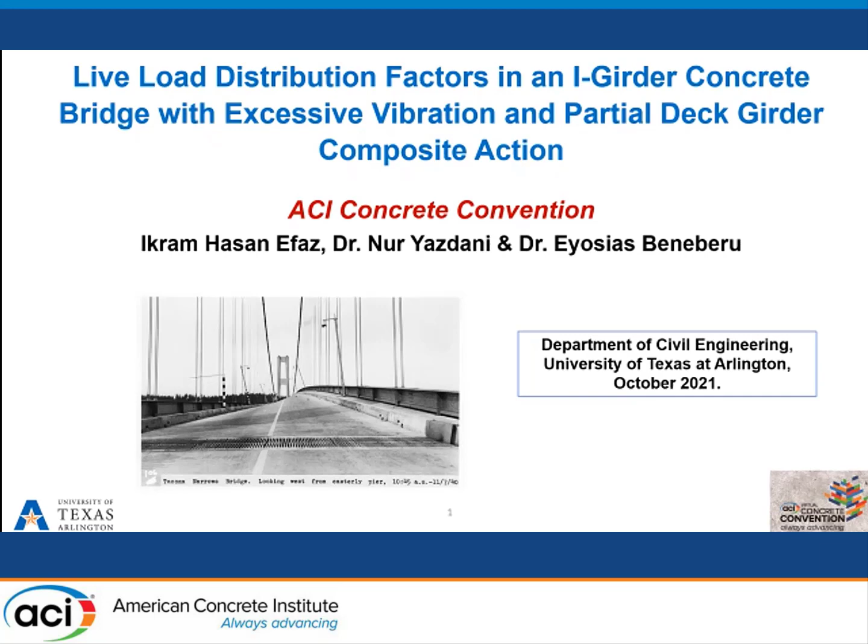My name is Ikram Hasan Efaz, and I completed my PhD from the University of Texas at Arlington this May 2021 in structures and applied mechanics, and my supervising professor was Dr. Nur Yazdani. Today, I'm going to present a portion of my research, titled Live Load Distribution Factors in an I-Girder Concrete Bridge with Excessive Vibration and Partial Deck-Girder Composite Action.

The outline of the presentation is the introduction, a description of the bridge, problem statement, diagnostic load test phase 1 and 2, then live load distribution factors, and finite element modeling.

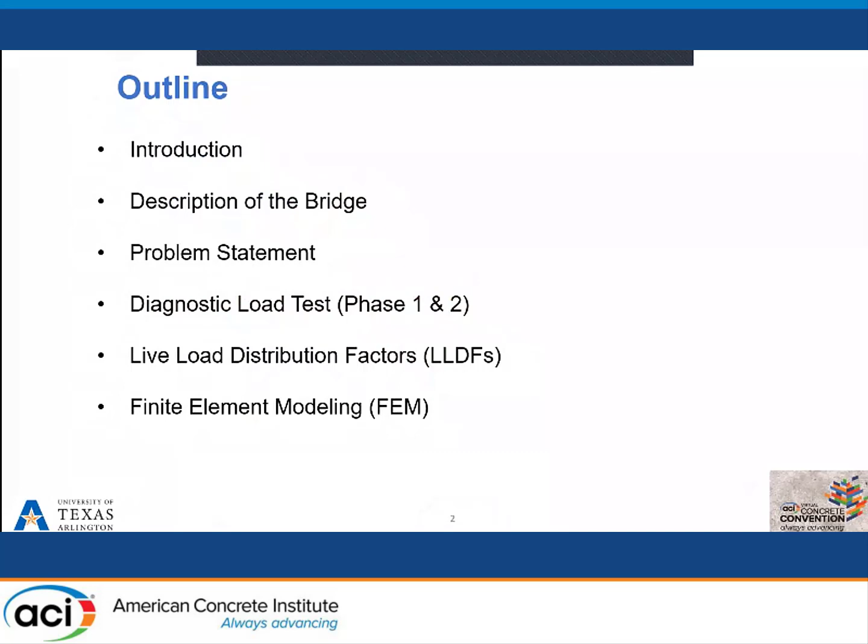The current AASHTO LRFD provision for live load distribution factor depends on various factors like span length, spacing, and stiffness of the girders. However, the AASHTO LRFD assumes 100% composite action between the superstructure elements, so it doesn't consider the effect of partially composite deck-girder interaction.

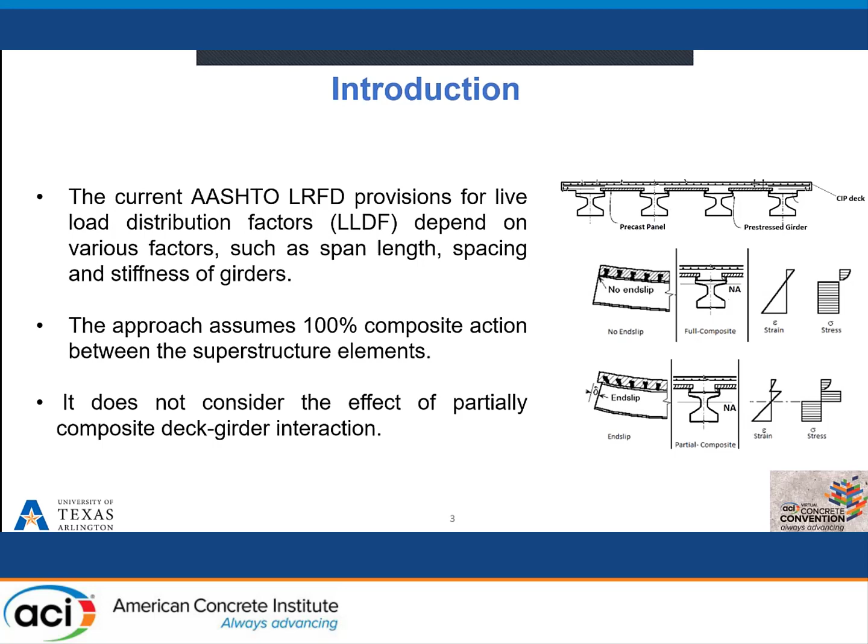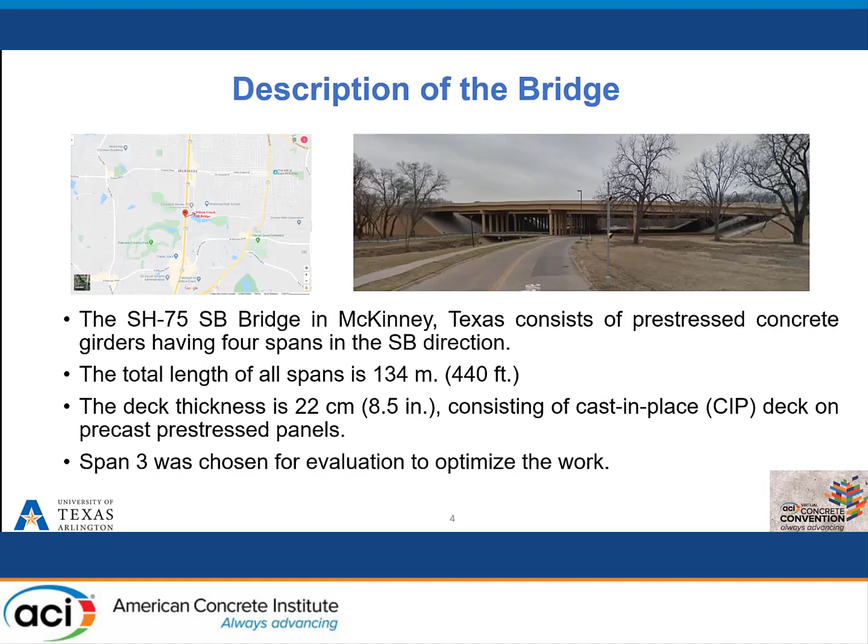The State Highway 75 southbound bridge is in McKinney, Texas. It consists of prestressed concrete girders in 4 spans, and the total length of all spans is 440 feet. The deck thickness is 8.5 inches, consisting of cast-in-place deck on precast prestressed panels. We only selected one span for evaluation to optimize the work, since that span has the maximum number of cracks and potholes. The bridge has 11 girders, consisting of TX54 girders, which is a very common scenario for bridges in Texas.

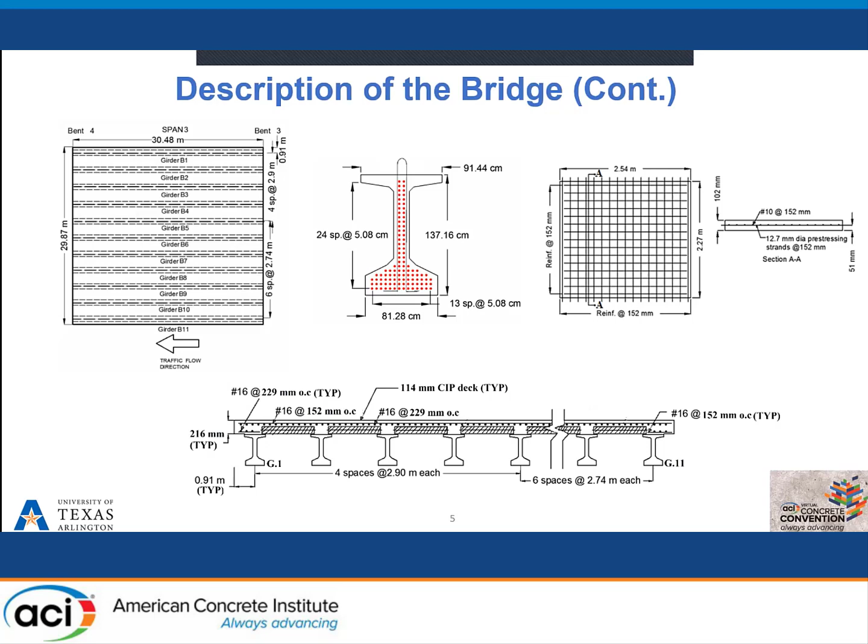For bridges in Texas, they use precast panels on top of the girders, and then there is 4 to 4.5 inches of cast-in-place concrete. All of these superstructure elements should be in full composite action according to the design.

However, the bridge was observed to have transverse and longitudinal cracking and potholes, and excessive vibration was also felt on the deck while there was traffic. The UTA team initially visited the bridge with personnel from the Texas Department of Transportation. The bridge was built in 2011, so it's very unusual for the bridge to experience such issues because it's a fairly new bridge.

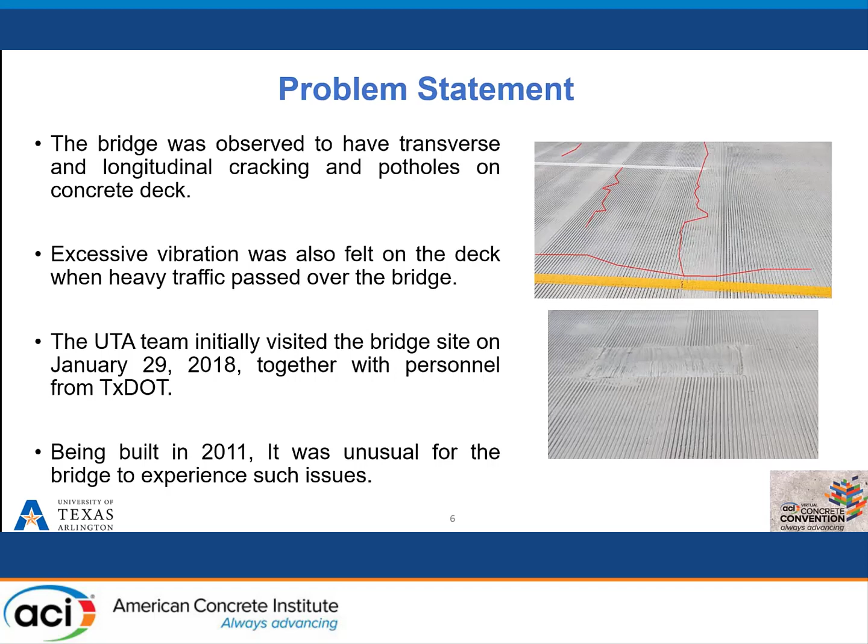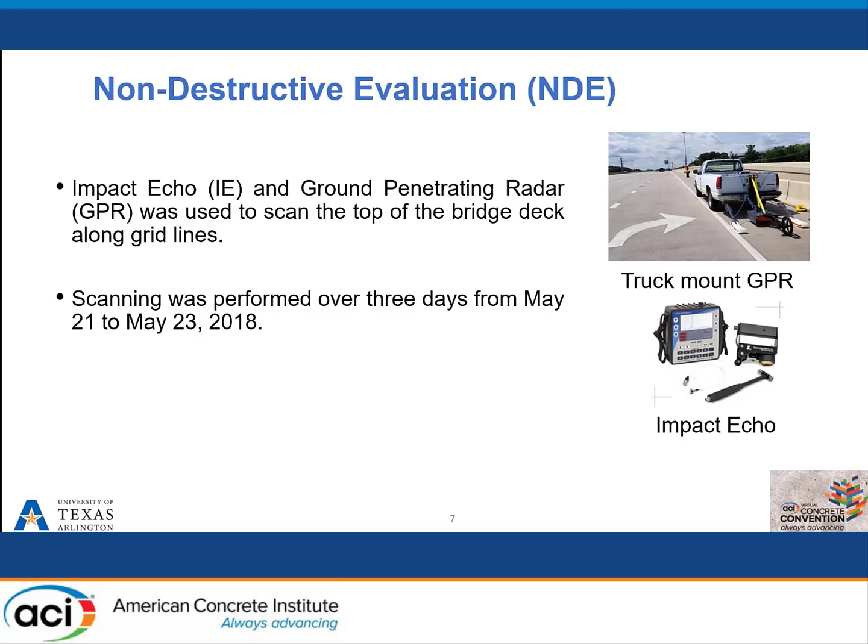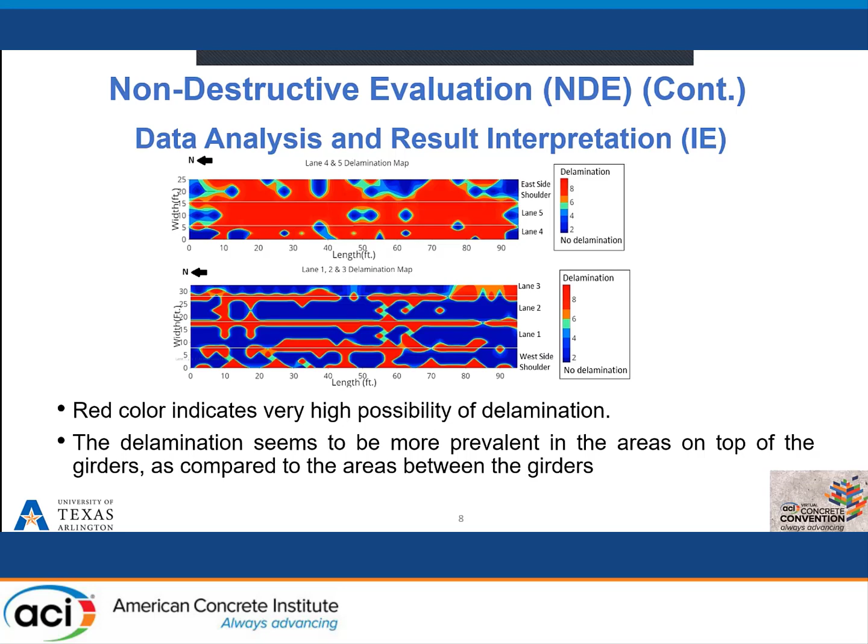So we did a diagnostic load test. The instrumentation is shown here. We used 26 strain gauges on the top and bottom of the girder, and also some strain gauges under the deck. We used a 12 rotational tiltmeter to find the end rotation of the girders, and also to find deflection.

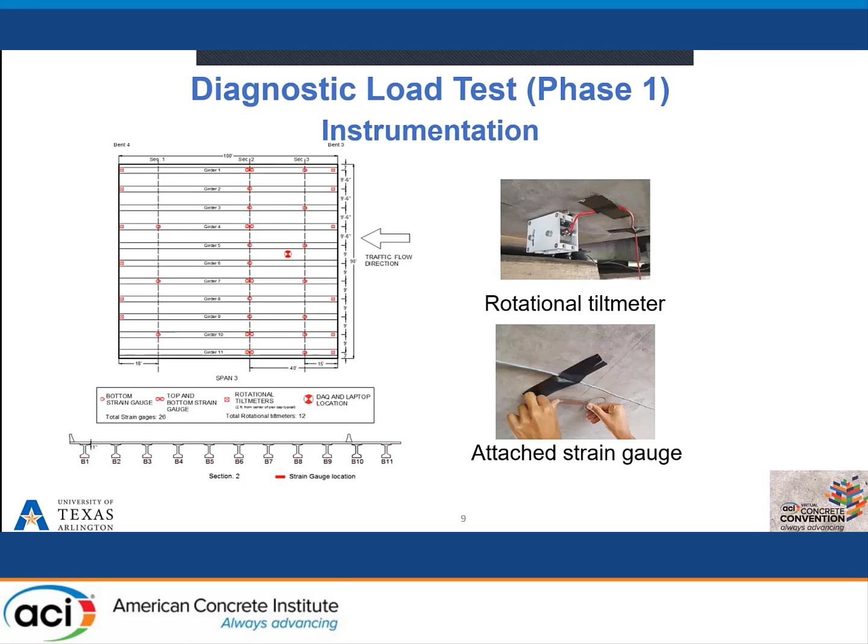Static load test was performed on span 3. Three trucks were used, and we did both a crawl speed test and a stop location test. The crawl speed test is where the truck goes on the deck, and the stop location test is when the trucks are stopped at the mid of the span for 30 seconds. We did this test according to the AASHTO manual for bridge evaluation.

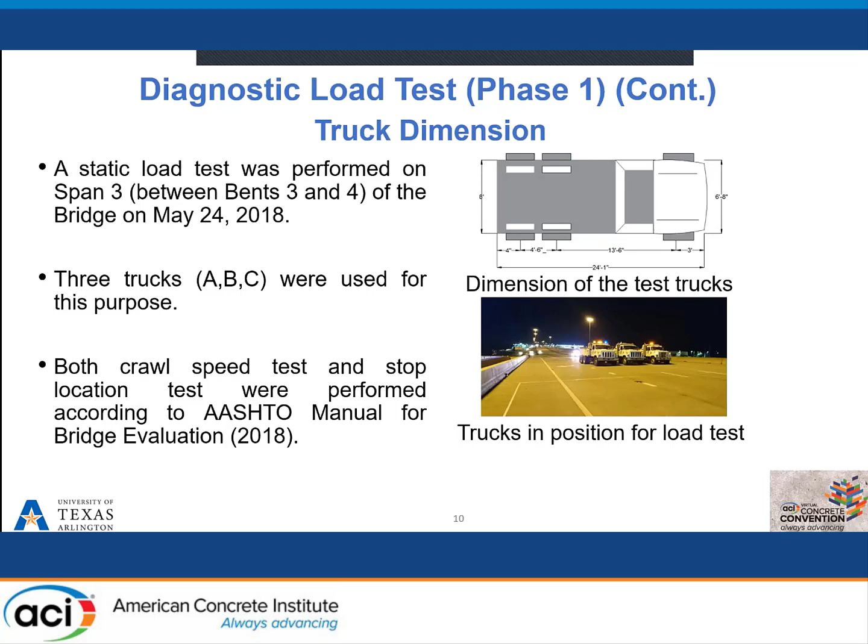These are the load test paths that we did. Every path was run twice to ensure the repeatability of the result, and we also show the weight of the axles of the trucks for the load test.

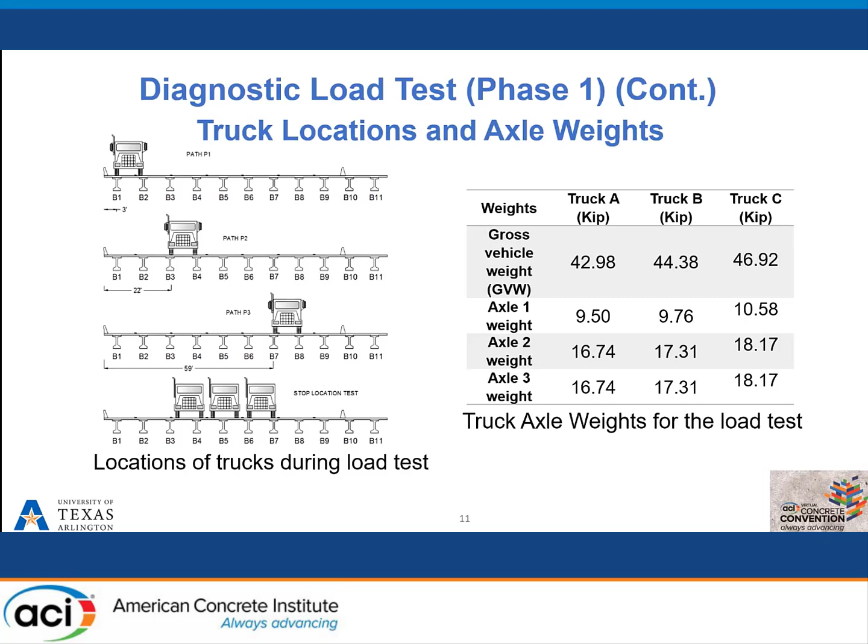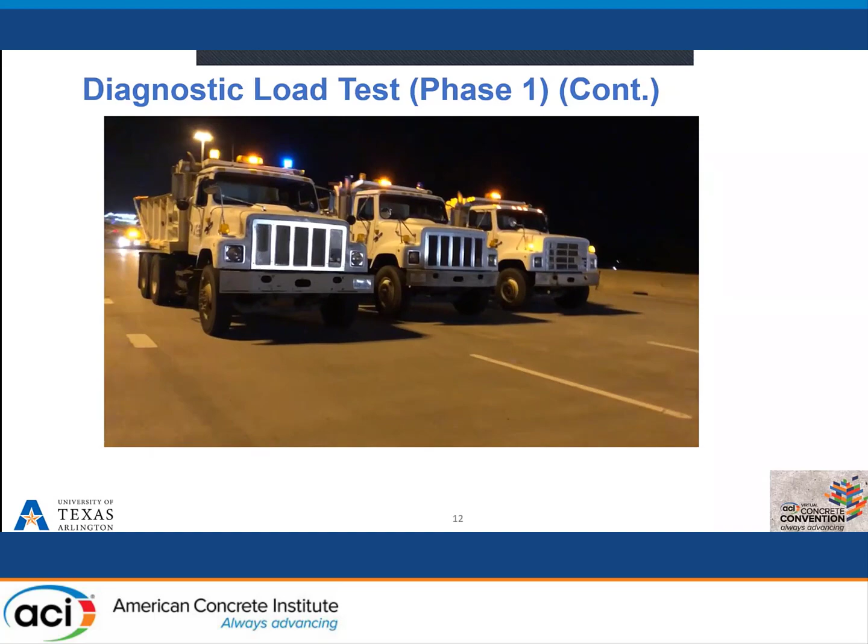So, load test phase 1: we can see the result here from the strain response for different paths. For example, for the first path P1 run 1, we can see that the truck tires are near girders B1 and B2, so B1 and B2 give us the maximum strain response, and so on.

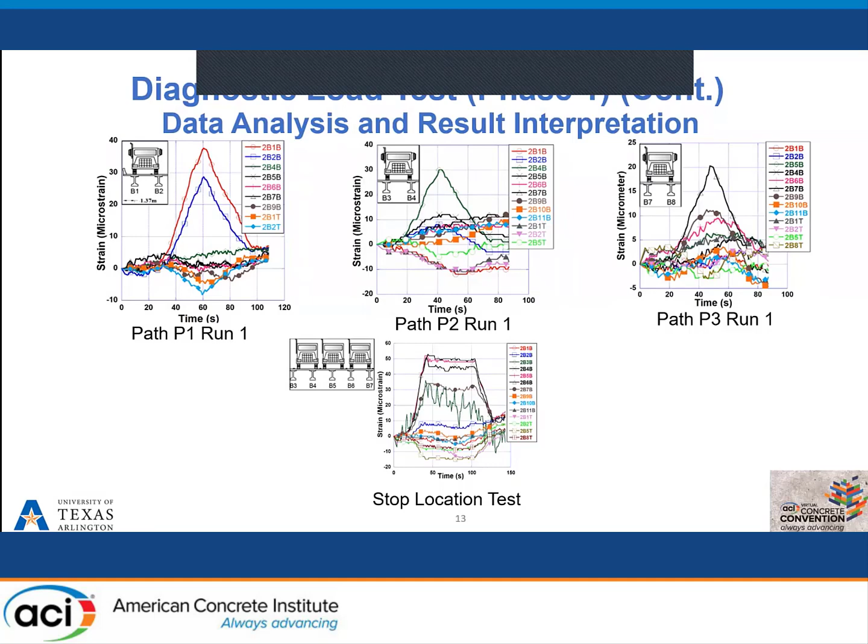We also calculated the theoretical neutral axis and the experimental neutral axis from the load test. We found that the theoretical neutral axis for full composite action was 57 inches from the bottom according to AASHTO, and the theoretical neutral axis for the non-composite girder was around 40 inches, but our experimental neutral axis was 43 inches from the bottom, which leads to the conclusion that there is a loss of composite action between the girder and the deck panel system.

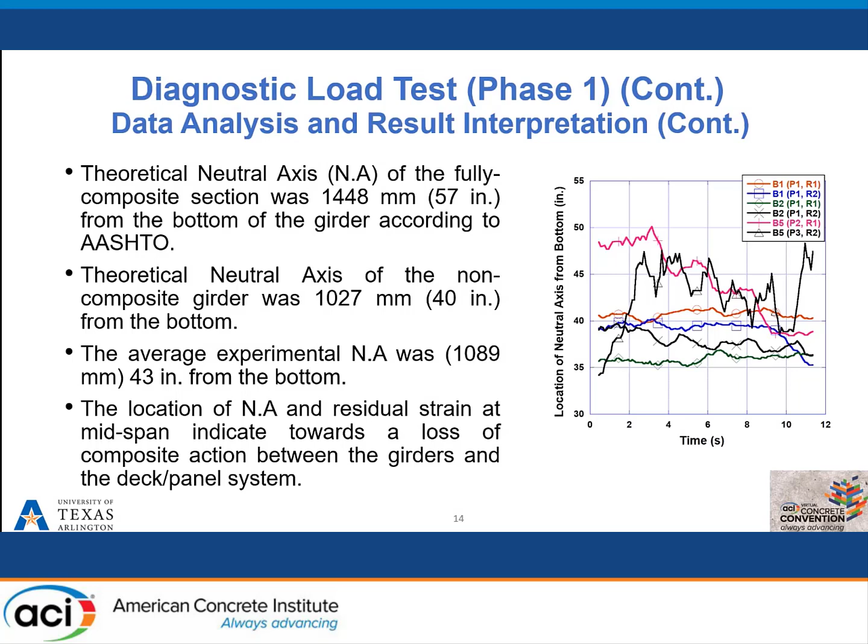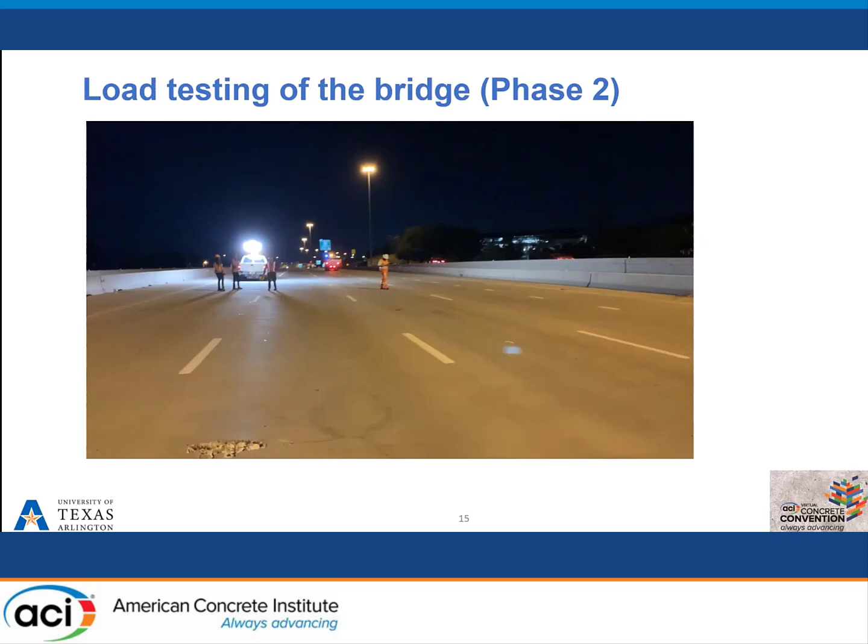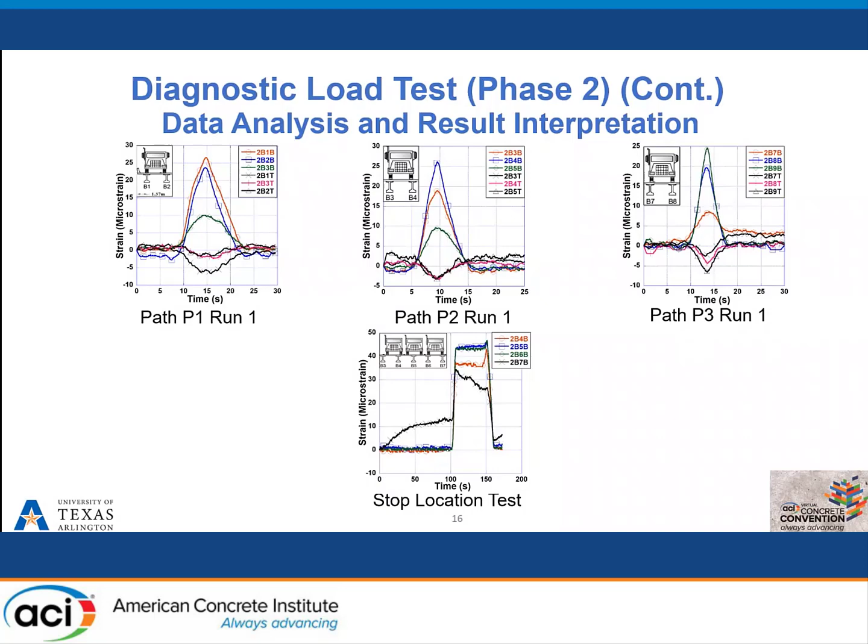After a year, we conducted another load test to see the rate of deterioration. Most of the setup was similar, so we could compare the results after one year, and we can see this is the load test result from the follow-up load test after a year. Results were pretty much identical to the initial load test.

However, there was only 15% composite action on average between the girders and the deck panel system, and due to possible concrete delamination and partial composite action, the lateral stiffness of the superstructure was reduced, and that's why there was excessive vibration due to the reduced lateral stiffness.

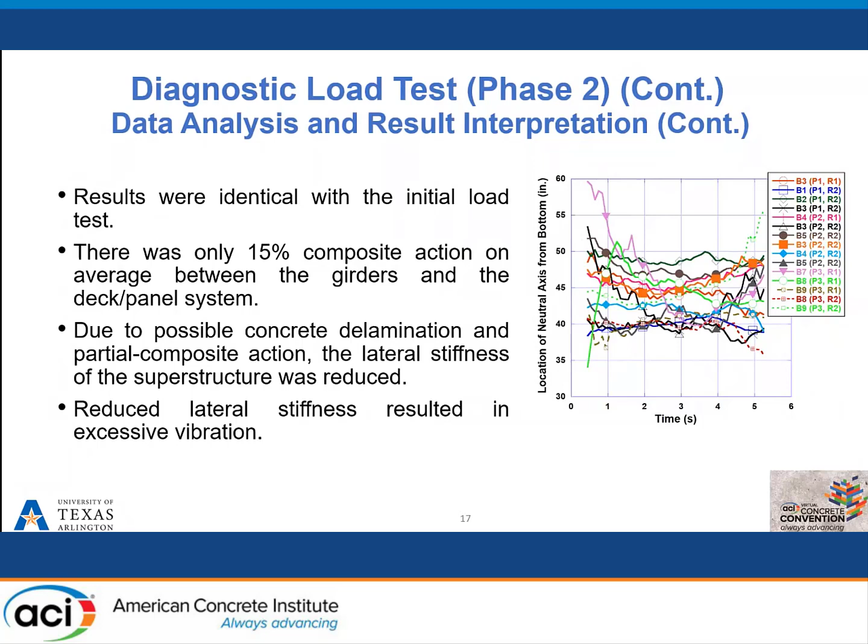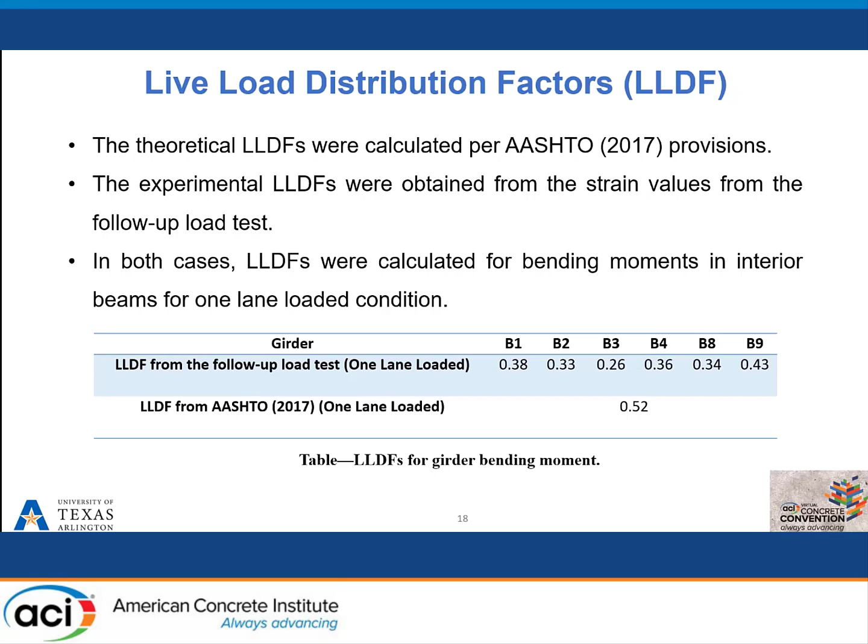So we calculated the live load distribution factor both using the AASHTO provision and also from the diagnostic load test. We calculated the LLDF for bending moment for the interior beams under one lane loaded condition, and we can see that the distribution from experiment ranges from 0.26 to 0.43, while the LLDF from AASHTO is 0.52 for one lane loaded condition. So the actual LLDF found from the load test is about 21% to 50% less than the theoretical value.

So the partial composite action in the superstructure resulted in a loss of lateral and vertical girder stiffness, which in turn compromised the girder load distribution characteristics. That's why extensive lateral and longitudinal cracks were also found on top of the deck, which supports our conclusion, and also the impact echo data showing a lot of delamination on top of the girder lines also support our statement that there is a loss of composite action between the girder and the deck panel system.

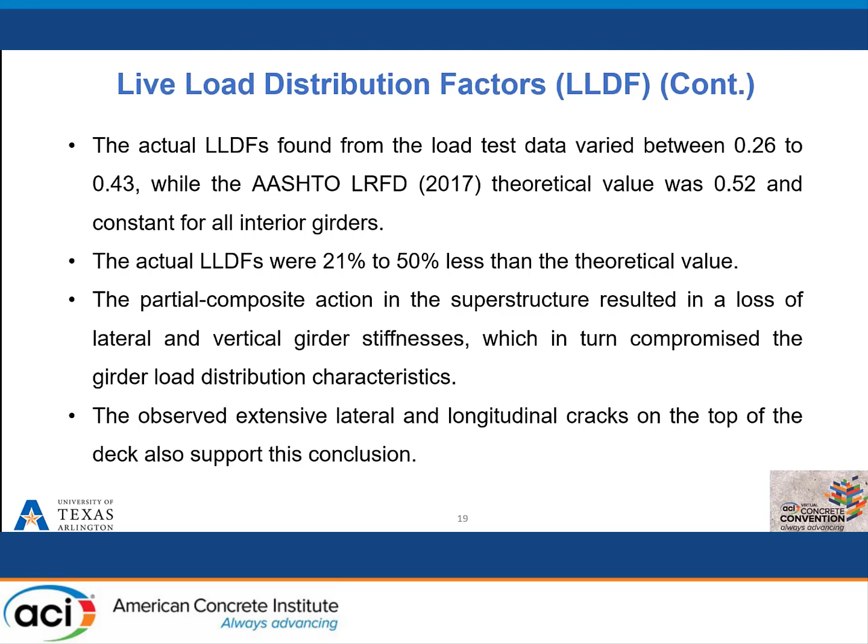And then we also conducted the finite element modeling. We modeled the bridge in Abaqus CAE. We modeled only one span, and also modeled 5 girders with the PCP and the CIP deck. The girders were modeled using solid 3D elements, while the reinforcement was modeled in 2D elements.

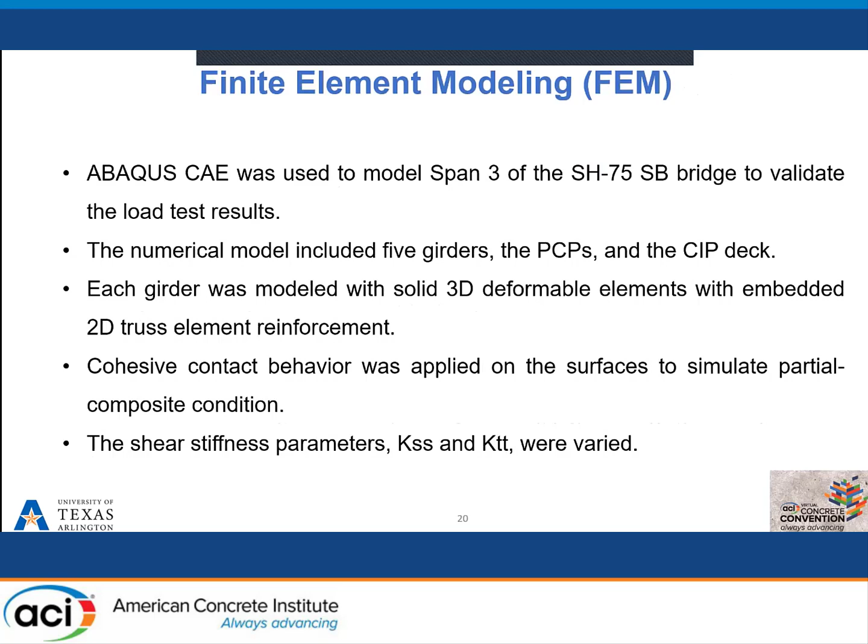So in order to induce the partial composite action, we varied the contact properties. We induced a cohesive contact between the girder and the deck panel system, and varied the shear stiffness parameter in order to induce partial composite action into the model.

And then we compared it with the experimental strain and the rotation value from the rotational tiltmeter, and we can see that the values matched quite well.

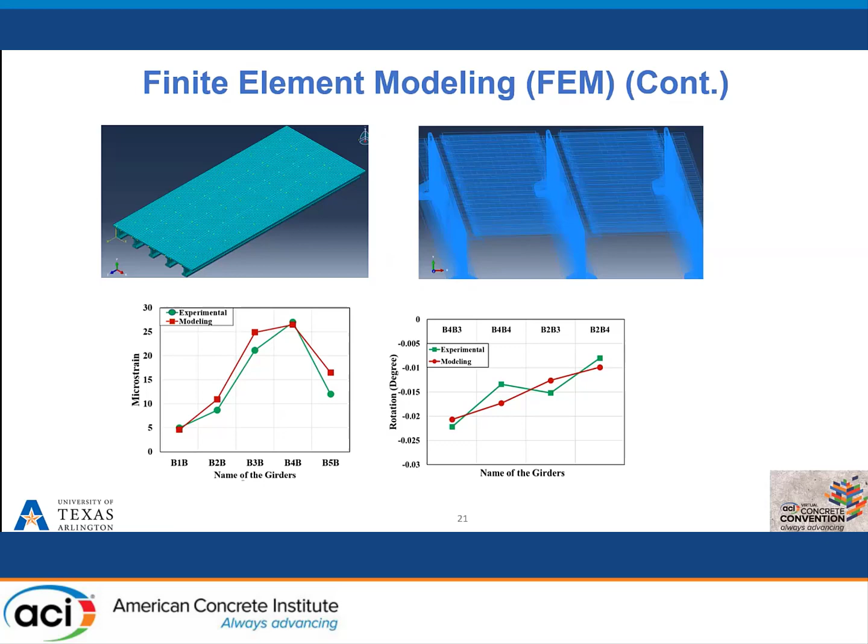This study is unique in the sense that previously there was no similar study to evaluate the effect of partial composite action on LLDF. So this study could be a reference, and in the future it can be used to evaluate the effect of partial composite action on the LLDF and can be included in the codes.

Yeah, sounds good. Thank you, Nur.